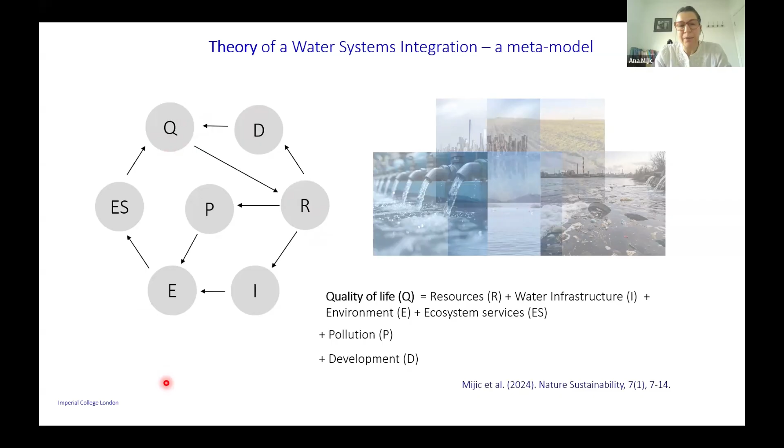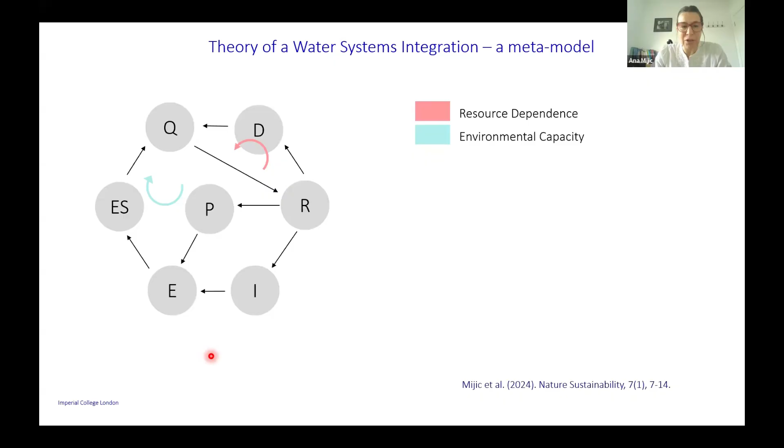We played with this meta model, and what we did was define these loops. We call this first one, the socioeconomic one, the resources dependence loop. This big one we call environmental capacity - how much we can extract from our environment without damaging it. And then the last one is infrastructure management, because our environmental capacity will depend on the way we design our infrastructure.

The whole hypothesis, which we published in this paper two years ago, is that unless all three loops are considered, we are going to fail in some shape or form.

We used what is called socio-hydrological phenomena, known paradoxes of unintended consequences of water management, and we managed to map six of them onto the same meta model. For us that was theoretically something that gave us evidence that we can think about this way, that we should think about this way.

And if you project this to anything else related to systems and water, it actually works. This is what Donella Meadows talks about - leverage points. The biggest change in the system is the change in how you think about the system. I think this was at least our attempt to get people to think about a water system in a different way.

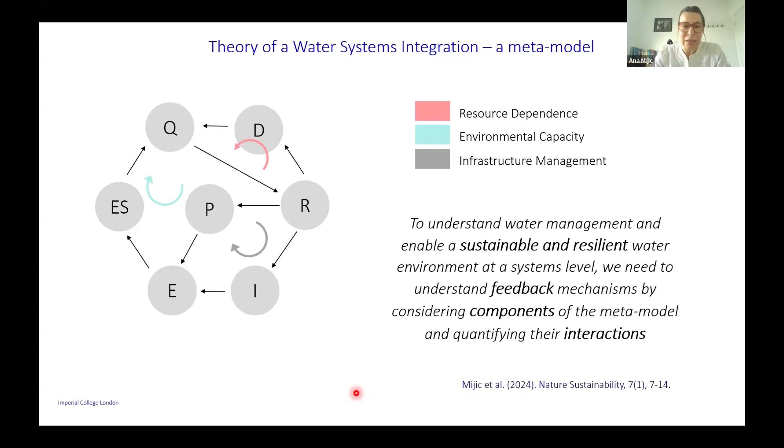So I'm just going to give one example from that work, which is also something people very easily remember. This is one of the paradoxes we discuss in the paper - the irrigation efficiency paradox. It's a paradox that actually applies to any technology development, and we see this very often with other technologies.

In this case, it was the example of introducing water efficiency, irrigation efficiency, which of course uses less water for the same or even increased yield. So you can see the color coding.

This was a technological solution on the infrastructure side, and we see the pink part, the development part, getting triggered, which is of course good. We want that because we know it improves quality of life - in this case it definitely increases the productivity and profitability of farmers.

But of course, there are processes that function only in the development or resource dependence loop, which is what was observed - because farmers increased their yield with less water, because it wasn't regulated, farmers expanded their land. And if you expand your land, it's logical what happens next: even if you use less water per area, with more land you will eventually increase total water use, possibly even beyond what was there before the efficiency was introduced.

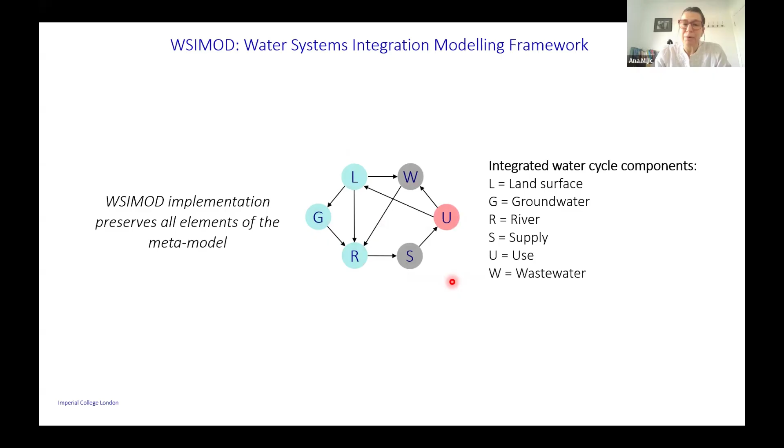We said, well, this is what physically is connected at operation. This is what we want to model. What was also important for me is that in this representation we had all the elements of our meta model. So we thought it is probably the most reduced complexity representation of the integrated water system.

And then when we started looking at how do we do this, what was important for us is to capture the physical part and the human part. It was also important for us to capture the physical processes so that we can do the interventions, so that the model has physical meaning and that we can infer the parameters and input from the data, but that it also has, of course, the human component of the cycle.

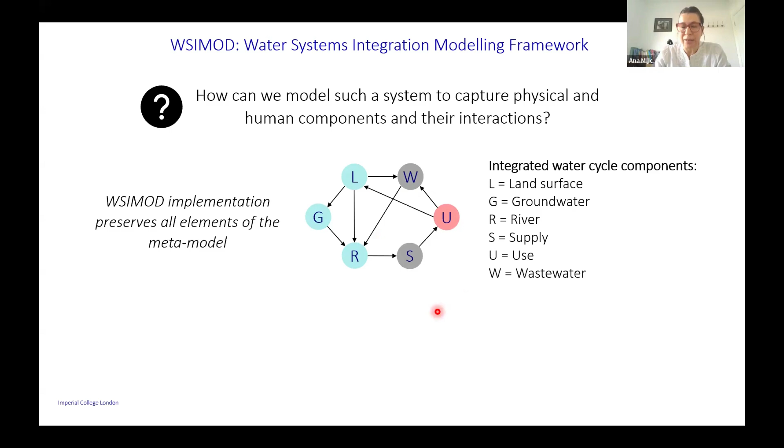So when we started looking into the literature, one of the options we had - and if there are people on the call who do water system modeling, they would recognize some of these models - basically each of these components can be modeled and is modeled using different types of detailed models.

So if you want to do hydrology, you can use something like SWAT. If you want to do groundwater, people use MODFLOW. For rivers, HEC-RAS. PyWR is a tool that's used in the UK for water resources optimization. If you do any networks, lots of people use EPANET or SWMM for water supply or wastewater. So each of these, there were options for each of these components. And of course, these are just some of the examples.

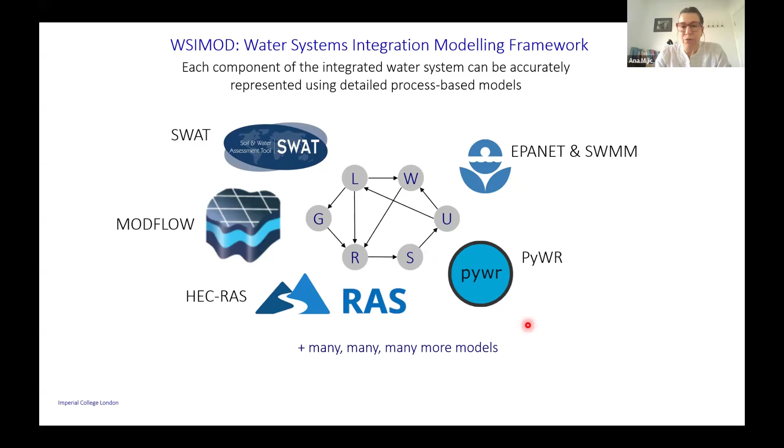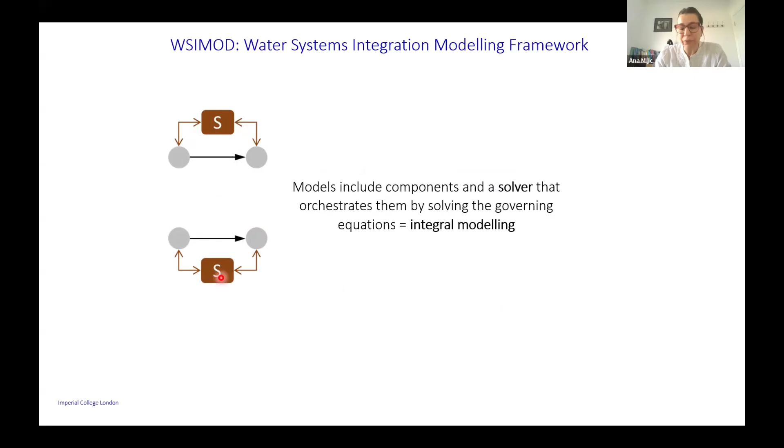So one alternative we had is to go into what is called in the theory integral modeling. So to take these - and this is now a very simplified representation of a model - each of these is an integral model, isn't it? Say this is SWAT, this is MODFLOW. And what we could have done is to say, well, let's take the models and let's try to couple them externally.

Of course, there are techniques you can do that. You can do different types of external wrappers. OpenMI is one of those. But we have also - I mean, we knew technically it wouldn't be easy - but we also found this beautiful paper from Voinov and Shugart. It's an old paper, it's from 2013.

He talks about what they call integronsters, and they talk about the challenges of adding these models, which are developed separately, together. They give these four key reasons, which were all something we wanted to avoid. They're difficult to understand, in a sense, because they very often come from very different modeling theories. They're hard to validate because they have different parameters that are defined in different ways. They're always computationally very, very intensive, and their modularity is almost non-existent, because once you change one, the whole link might change.

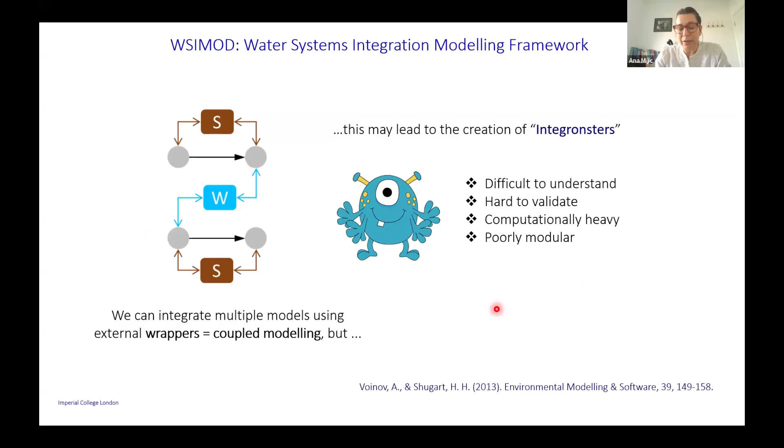So we thought, well, there must be an alternative, and this is really the acknowledgement of the great work of Dr. Barney Dobson, who was a postdoc on that project. Barney looked at the literature and said, well, why don't we try a hybrid approach?

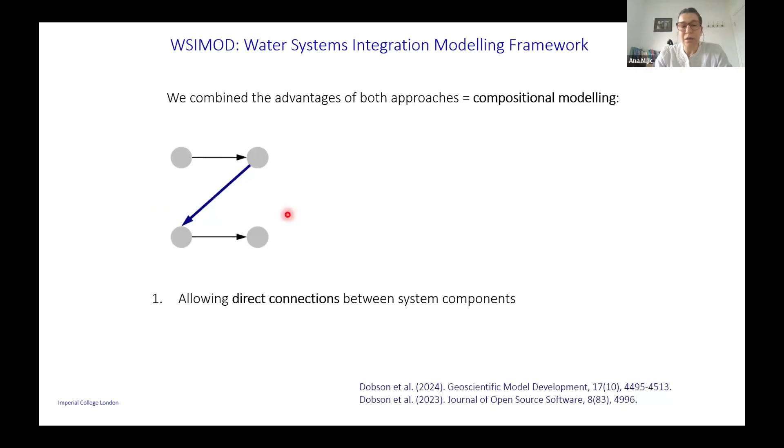And we call that compositional modeling, where instead of taking different models, we basically find the reduced complexity representations that fit our representation best. We recode them, enabling direct links between the components. So this is all now one software where we explicitly add the components.

Instead of having the wrapping, we developed internal bespoke orchestration that, rather than having an internal numerical solver, governs the sequential movement of the pollution and the water, the flow and pollutant within the system. This gives us computational efficiency, because we don't have a numerical solver, and high modularity, because we can connect any link with any other link. These nodes represent different components.

Behind each of these nodes is a model, and the links can have different characteristics—they could be simple propagation, or they could have rules within them, enabling us to represent any management decisions, so human behaviors, which we wanted from the beginning. It is easier to understand because everything is within the same modeling framework.

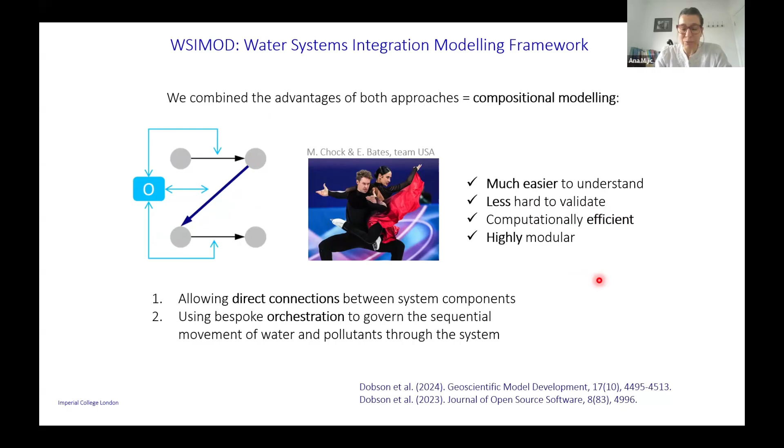I would say it's possible to validate because the model is completely integrated. So if we move one part of the model and change it, everything else changes. So we can at least track the uncertainty and attempt to validate the system as a whole. And as I mentioned, it is highly modular, and we were really happy with that.

So how does the model look? If you look at the catchment, which is our basic spatial unit where we can close the water pollution balance, this is the representation. If people are familiar with conceptual modeling, they would usually represent the natural part of the system—land, groundwater, river. What we did was add other parts of the system in the same representation, with explicit representation of the use, and a very flexible representation of these links.

This QR code should take you to the paper that leads directly to GitHub. The source code of the model is completely open and available for anyone to use, with pretty good documentation. What we get from the model is, for a catchment as a kind of minimal spatial unit, time series of flow and different water quality indicators. We normally model nutrients—suspended solids, nitrogen and phosphorus. We could model other pollutants, but it depends on the data we have. Our default spatial-temporal resolution is daily, so we usually do a daily time step.

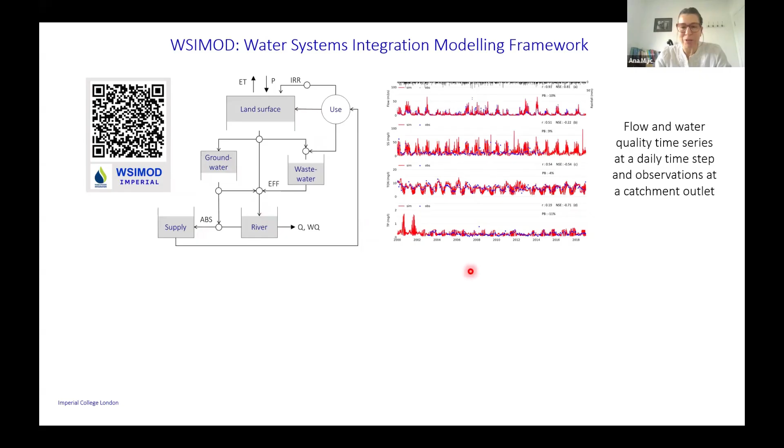And of course, we do the validation. We normally validate the model on flow and water quality in the river, because this is what we have data for, although we can validate other parts. We have examples where we also validated the groundwater representation. We are doing now validation around the wastewater effluent. We can validate on supply reservoirs as well, and of course soil moisture, ET. So we can validate on different things, and this is really interesting because it does show a lot of potential for equifinality in these complex models, but it is an interesting thing to examine.

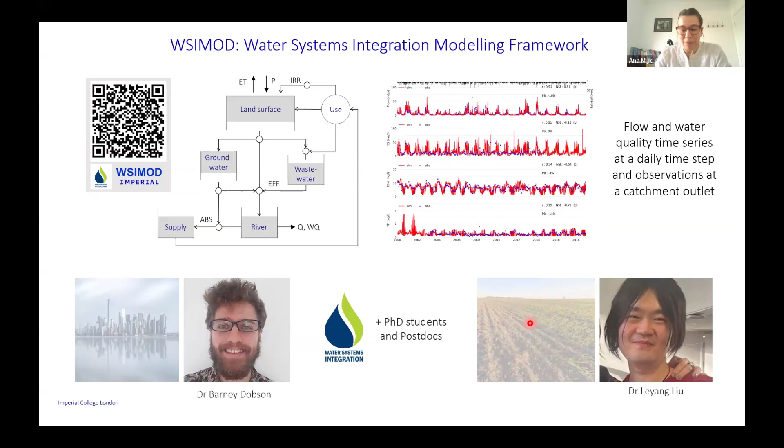I have to mention two people explicitly. I mentioned Dr. Barney Dobson, who is behind the framework and who coded the urban part of the code. We were very lucky to have a brilliant PhD student, Dr. Leyang Liu, who coded the rural part of the system in the core WSIMOD representation. Of course, the whole team, since basically 2018, most PhD students and postdocs have been and are working on some aspects of WSIMOD.

So for the rest of the talk, maybe 15, 20 minutes, and hopefully we'll have time for some questions, I'll just show some of the examples of the work.

What is really good and what we are very happy about is that the model works relatively well with minimal calibration. These are just some of the papers we published, with different versions of the model. We call the model now WSIMOD, but in the early versions of the work, we developed the urban representation and then the rural one, so there are models we called CityWat and CatchWat before we got WSIMOD.

But these are the four key case studies we published so far, and you can see they cover different aspects of England—North London, so River Lea, Upper Thames, Norfolk, and then our big study in Manchester, which are very hydrologically different in water management context. The sizes of the catchments and the regional systems are very different; Upper Thames is our biggest model.

You can see here the performance for the flow in different catchments. We normally use what is called Nash-Sutcliffe efficiency, and anything above 0.5 or 0.6 is really acceptable. The performance is, of course, better in some catchments than others.

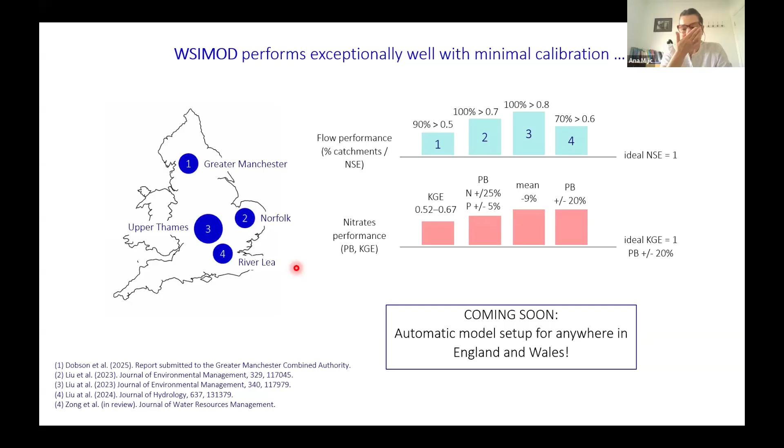These models are all manually calibrated for different case studies. What we are doing at the moment is setting up the model and testing how we can improve its performance without automatic calibration - really understanding what information and which processes we are missing, rather than trying to fine-tune the parameters.

Why we like the model and how we use it - I like to call this detective work, because if you have integrated models, you can really ask the model different questions. This is one of the works we did with Leyang after he finished his PhD.

We looked at the Upper Lea case study. This is the River Lea. The Thames is here - this is north of London and the hinterland. It's a big groundwater system, and one of the things that is really interesting here is that lots of abstractions come from this region.

One of the water management options the UK Environment Agency is considering is reduction of abstraction licenses to increase low flows in the river because of ecological constraints. One of the things we did here is say, well, if we know where the abstractions are, we can reduce them equally, or maybe we can use the model to track where the water is coming from.

So this is what we show here. If this is, for example, the location which is really important for environmental flow - where we want to ensure there's enough water - we can say let's see where the water is coming from at this location, what's the contribution of different catchments to the flow, because if we know where the highest contribution is, maybe this is the catchment where we should reduce abstractions most to let the water come back to the river. This is what we call the assessment point.

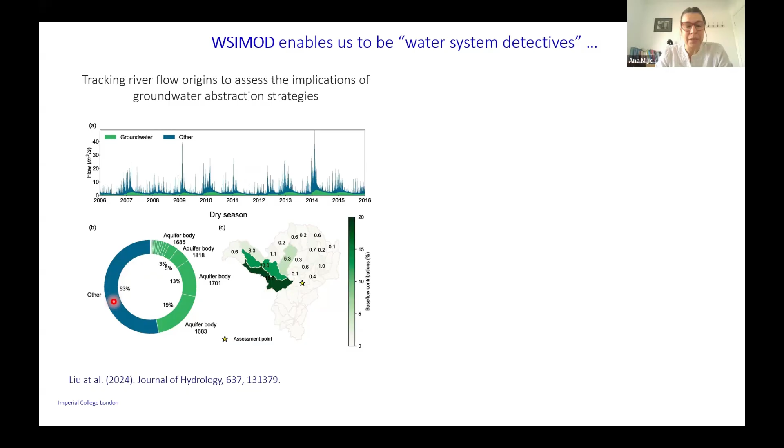So with this information, we said, well, why don't we then run different abstraction scenarios?

So this is the default, something that the Environment Agency was considering, which is the equal ratio reduction. We equally reduce the abstractions from all the catchments that currently have the abstractions, and we look at the change in the abstraction - how much less water we are taking out - and then we look at the implications for the mean base flow, so how much more water will be in the river if we do this. This is again the default.

And then we do two scenarios. We do what's called the prioritized reduction, so reduction in those catchments that contribute most. And then we do one more, which we call prioritized and adjacent, where we also look at the proximity of the catchment to the assessment point.

We see that in both scenarios, if we compare this, we either have the same amount of base flow - new water in the river - with much less reduction in the abstraction, so more water for the resources. Or if we have the same amount of reduction, which is of course not good news for water companies, at least we have more water into the river. So both of these options, at least theoretically, would give better results for both the water company and the Environment Agency, compared to the basic option to equally reduce water abstractions.

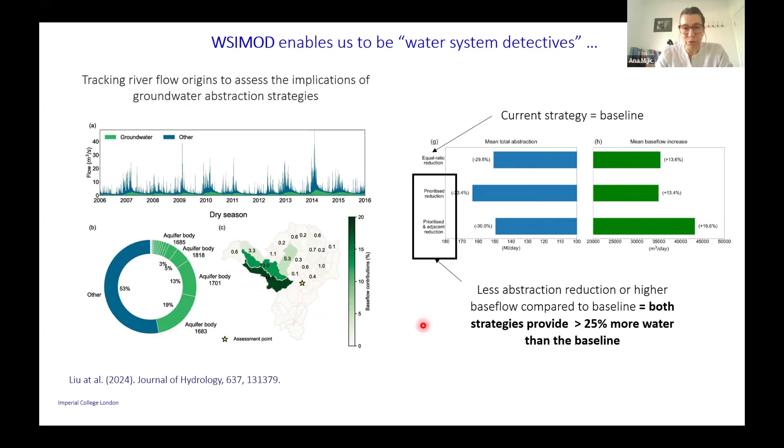We also can use the model to develop options that originate from integration. This is one of our earliest work, and we haven't actually explored this to a level that we could now. But the thinking behind this is very simple.

If this is our integrated system, what we know is that in rivers where we have discharges and supplies from the same river - which is at least in England the case for about 60% of rivers - we can take this information and try to understand what is happening, and try to see if this integration between the abstractions and discharges can actually give us an option.

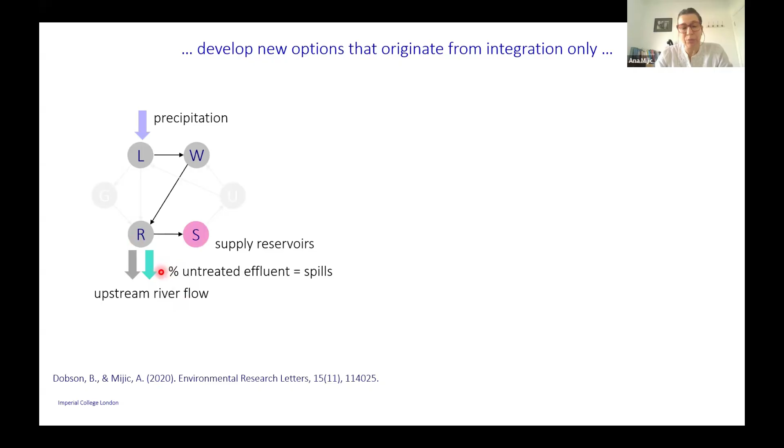Of course, one big problem that we have in England is the problem of untreated spills - water coming from the wastewater without treatment and creating pollution in the river. So what we did here is look at the integrated system and plot different relationships. In this case, we look at the precipitation and the percentage of untreated effluent.

And we look at the same information, percentage of untreated effluent - this is the blue arrow - and the supply reservoir volume. Why this is important: all the red dots are where the precipitation is higher than 10 millimeters, so all the days when the precipitation is higher than 10 millimeters, which is likely to trigger spills. And then for the same days on the supply side, these are all the days where the reservoir is basically full.

So that triggered the thinking: why don't we use this information and say, on those days where we have high rainfall, why don't we minimize abstractions? So we reduce the abstractions. We introduced the rule that reservoirs have to be more than 99% full. And what will physically happen is that because we are minimizing abstractions, we're leaving more water in the river. If you have more water in the river for the same pollution, you will improve the water quality - you dilute the pollution and theoretically improve the water quality.

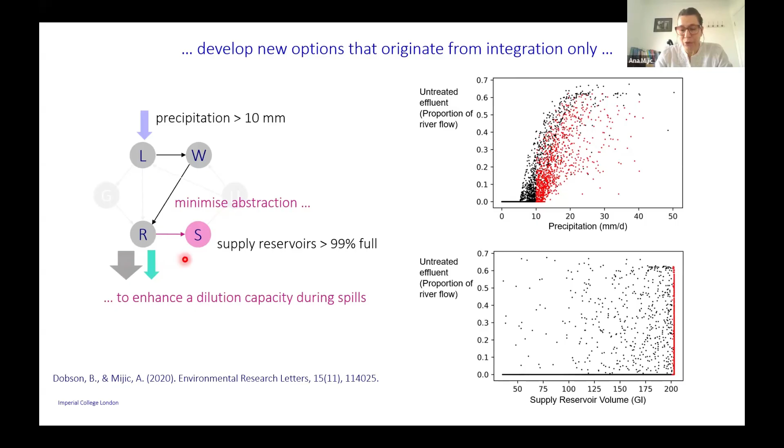So we did that, and we looked at the results, and the results were really nice. We call this the abstraction effluent dilution option. We look at phosphorus without the option and phosphorus with the option, and you can see here, especially for these high concentrations - this is the situation of what would happen if you do nothing - you see the reduction in these high concentrations. We then calculated that if we wanted to achieve the same effect with storage, it would be equivalent to building around 180 megaliter volume storage, which of course is a huge investment.

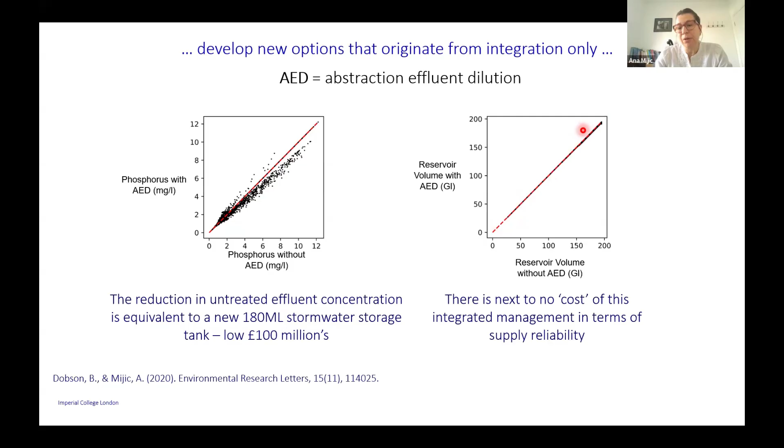And then if we check what is happening in the reservoirs, we want the line to be the same because we don't want to affect too much the supply side. And there are almost none of the negative effects - I think there's only 6 additional days in the 100-year simulation period where the supply comes in at the lowest level of restrictions.

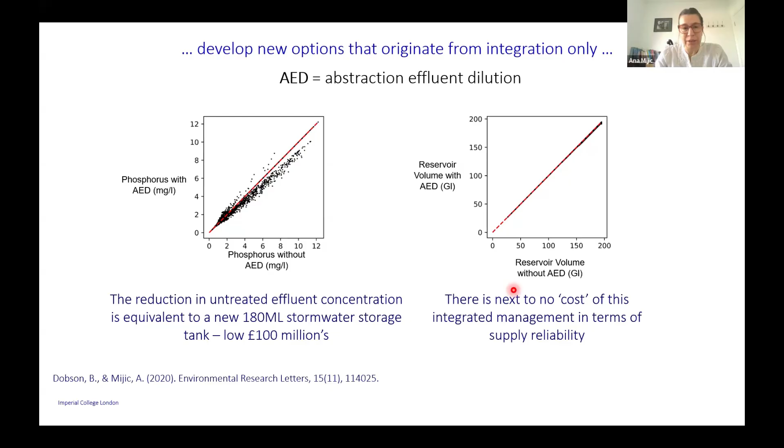Because we have the integrated system, we can also look at the co-benefits and trade-offs. So when we think about management, we can change any component, or we can change or add any of the links.

This is also when we talked about the beginning about different thinking. For me, thinking about water management is thinking about functional relationships, which is to say, if I want to increase my supply, I can add storage, or reduce leakage, or reduce use, or redirect water, or increase storage in the land.

So rather than saying nature-based solution, I think about it functionally, what will happen with the water in the system. This is our early work, but one way to look at that is to say, what are the different options that can happen across the water system? We see a few supply side options, a few wastewater side options, and some green options like green roofs and rainwater harvesting.

We look at the performance across different metrics, and it's really important to see how the options change all the elements of the water system. What is nice, and what we kind of expect but isn't often quantified, is how supply side options have lots of co-benefits on the wastewater side, because the system is physically connected. Demand reduction has a really significant positive impact.

My final example is the work we did looking at the link between housing and water management. This is really important because at least in the UK, housing and development come first, and then water goes second, trying to accommodate all the new development.

What we wanted to show with this work is the price of that, and we did a case study using the old London plan — the new one is coming out any day now — around 500,000 homes in London by 2030. We added those houses into the model and simulated the impact.

We looked particularly at three indicators: increase in demand, increase in surface runoff, and increase in pollution in the river. We wanted to see what the impact is — these are the dashed lines — and whether we could introduce a range of measures, in this case entirely on the housing side, to offset that impact.

If we can offset the impact, which we can as the numbers here show, we call it water neutrality — achieving a water neutral London, basically having London with the same indicators as before the development was introduced. Of course, this doesn't mean these are good indicators, it just means they're not getting worse. And we managed to achieve that in the model.

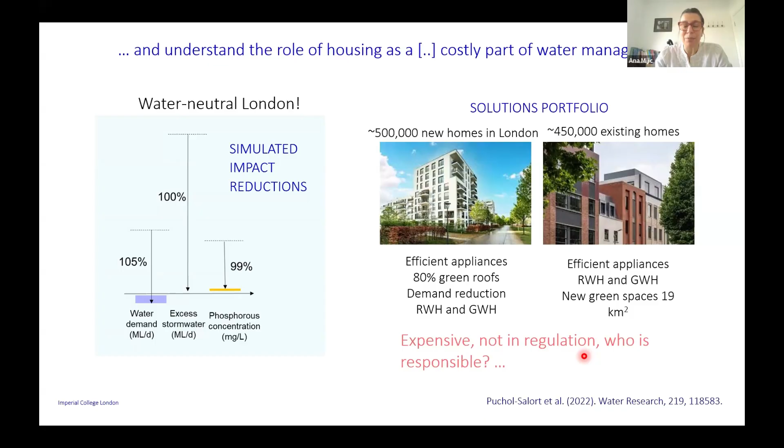So I'm gonna finish with this, which is what next and what we are doing now. Of course, because the model is very flexible, we are thinking about new functionalities. One thing I'm really interested in, we did start thinking about this but want to explore it much more, is control systems, to look at optimization and control and really maximize the value of the model, because we can represent different decision rules. Another thing that's very interesting is water transfers and wastewater recycling, so we're going to start looking into that.

Most of our applications, as I mentioned, are in the UK, which is a very centralized system. We will be expanding the model in other case studies, looking specifically at decentralized water management. We're starting a big project looking at the water system in Paris, and they're particularly interested in decentralized options. We're also thinking about technological representations. Again, we can simulate a lot of nature-based solutions. Is there anything on innovation and technologies which we can try to represent in the model, or even that the model can inspire some technological innovations? This is purely the modeling aspect.

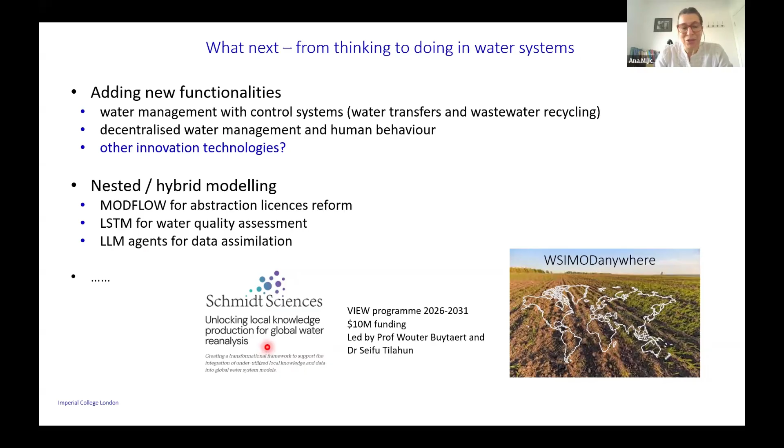And then this last bit is quite interesting, part of this big project we've just started, with the Schmidt Sciences Philanthropy Foundation. They designed what is called the VIEW program, which will focus on development of global water reanalysis data, and ours is one of the 4 projects looking into that. Our purpose specifically is to look at local knowledge and new information that we can add to the models, either on the input side or the validation side, which will likely need some form of LLM agents or AI assimilation to be able to upscale. This has just started - we're assembling the team, and the program is 5 years, so hopefully there should be some really interesting results coming from this work.

And this is all from me. Thank you so much, and I would be very happy to answer any questions.

That was awesome, Ana, thank you very much for that. I think we've got plenty of time for questions. I've got my eye on the participants list, so feel free to just come off mute and throw one in. I might start though with a question about...

One of the last things you talked about was some of the complexities around regulation and human behavior, and how those might get incorporated into a model in the future. You talked about Paris and other urban environments. Are you interested in doing that kind of analysis on other different areas? What comes to mind is within the United States, or the states in Australia, neighboring municipalities may have radically different, if not diametrically opposed, policies around water quality requirements. Have you identified any places where regulations are so different, but still governing or influencing water quality in the same body of water? Are you looking at the influences of things like regulatory frameworks?